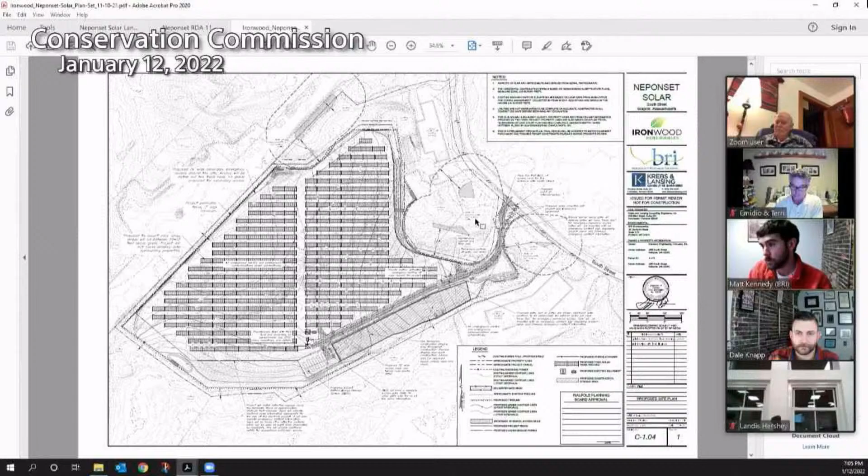So here's the entire site plan. Specific to this RDA, we performed a wetland delineation, and on the site plan you can see where we flag these wetlands. They're all pretty small wetlands that we have given. None of them are bordering vegetated wetlands based on the definition in the Wetlands Protection Act and our communication with the conservation agent. We did a site walk back in the fall and looked at these. The project has respected a 100-foot buffer surrounding these wetlands.

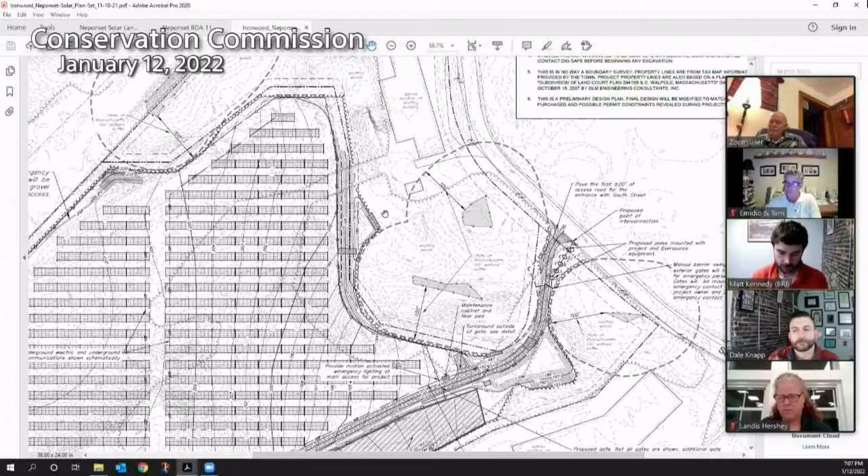Regardless of them not being BVWs, we've still given them that 100-foot buffer. So that's what we put into our RDA, that we do not believe the Wetlands Protection Act is applicable and we're not going to need to do any compensation, because we're not impacting any of these, and they're not regulated wetlands under the state's wetlands laws. I'll open it up to questions on the RDA for now, and then we can go into the land disturbance application if you have more questions on that. We'll proceed on the RDA at this point, then we'll get back to the land disturbance permit.

So, Landis? Yes, hi Matt, I just had a couple of questions. One, when I was out on the site and we walked it, there was an area of wetlands to the far end of the site, all the way back. This one? So if you go all the way to where the hill is, yeah, and the little basin, somewhere. I remember walking through the site and standing on a ridge and then heading down, and there was a wetlands there. Was that determined to be way off-site, or?

It was, yeah, it was off the property. And over 100 feet, so it wasn't even shown on the plan? Correct. I think we did locate the stream off-site, Matt, I don't know if you have that distance off the top of your head. We were able to use aerial photos to snap a few lines, and I believe those were included in some of the application materials. But that wet area off-site, the back of the parcel, was off property and is 100 feet from the limit of disturbance.

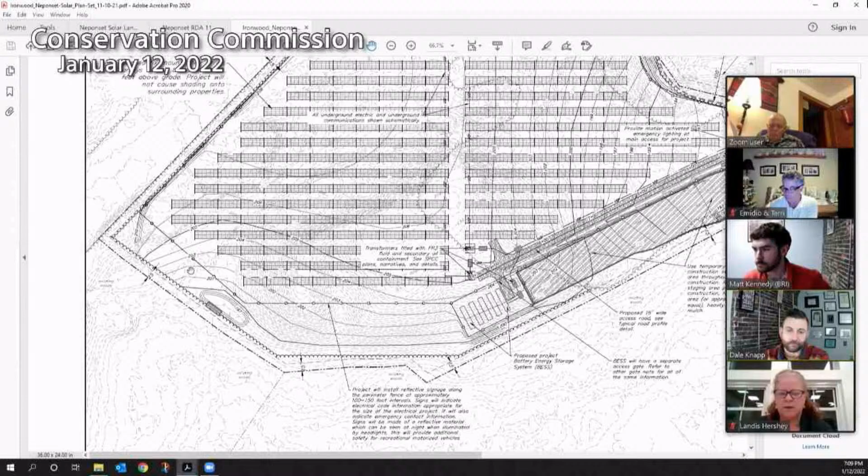I just wanted to explain that the Neponset River is across on South Street and also to the east of the property, over 200 feet from your site. That's correct. We're not within the riverfront area for this project.

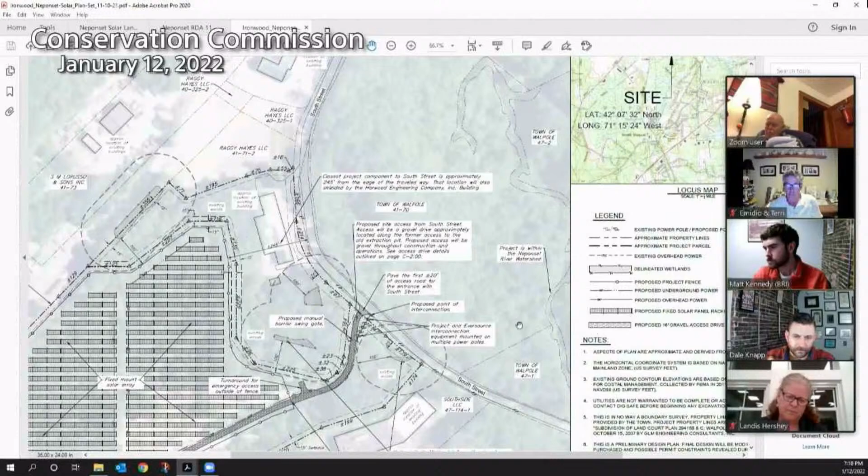Just showing it's there, and then it loops up around behind the building, not Tufts, but the other building next to Tufts. It loops up back. Oh, there you go. That's good. So I just want everyone to see how far the river is away from the site.

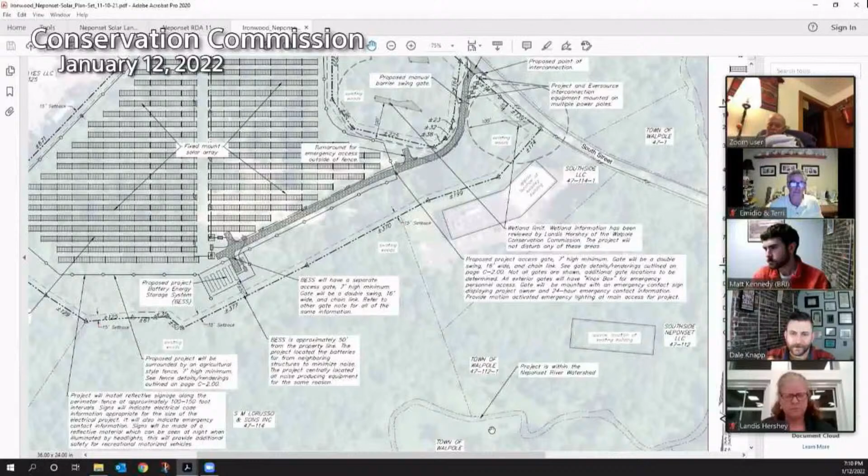Anything else? Any questions? Dean? No questions for the RDA. Bailey? No questions. Doug? Yeah, just a maintenance question.

In the winter, if you need to clear snow off the solar panels, where would you store it? So we don't clean the snow off the panels. It subsides off as temperatures change. The angle of repose of the panel allows it to simply slide off after it snows. Typically the drip edge is about 36 inches above the ground, so as that snow slumps off, it piles up on the ground. Removal of snow within the footprint of the panel area is not required.

So Doug, we were just going to do the request for determination and get that out of the way under the Wetlands Protection Act and the local bylaw, and then go into the land disturbance where we can address more questions like that, because there are two different votes.

Okay, I have no other questions. Betsy? No comments. Al? I don't have a problem as far as the determination is concerned. Jack? Yes, I don't have any questions either. Emidio, any questions? Yeah, I have several questions. No, okay, thank you.

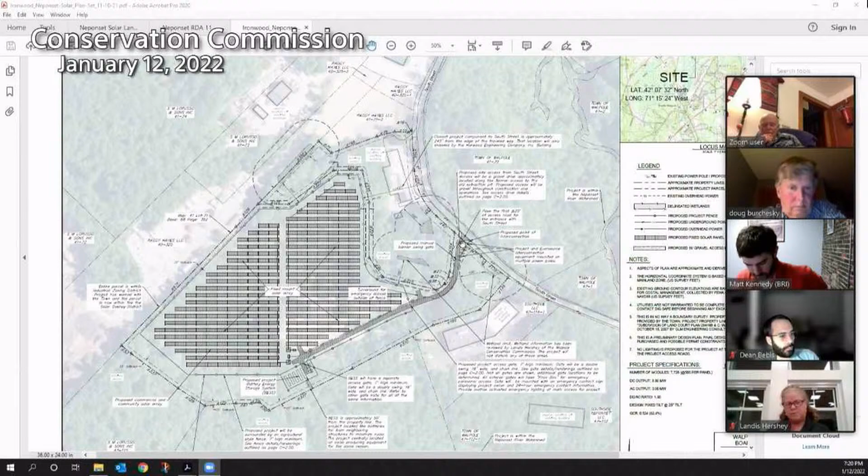But other than that, we propose to install a fence around the entire project. The NEC National Electrical Code requires that it be at least 7 feet high. We've got an access gate here that we propose to have a Knox box that will allow for emergency personnel to access the property in the event of emergency. They'll have the ability to open these gates and get in with their vehicles and equipment.

There'll also be some small signs at the gates that will have 24-hour emergency contact information. There'll also be some motion detecting lights at the main gate, so that if a car pulls up, they can find that emergency access number pretty quickly without the need to pull out a flashlight or anything like that.

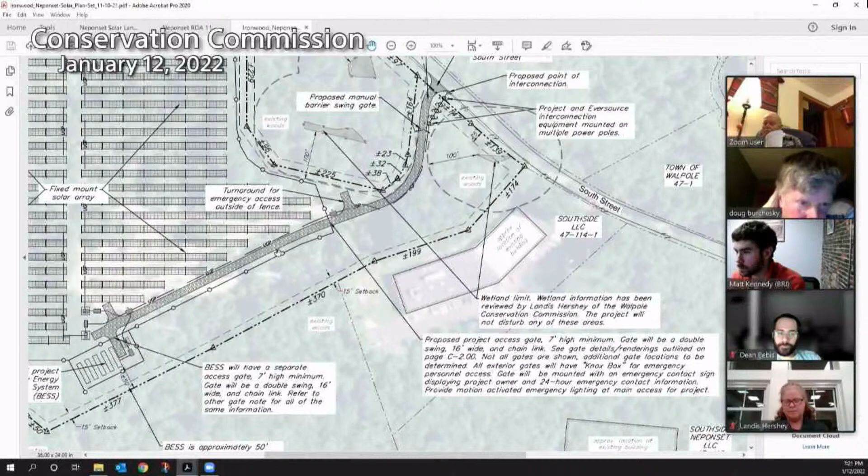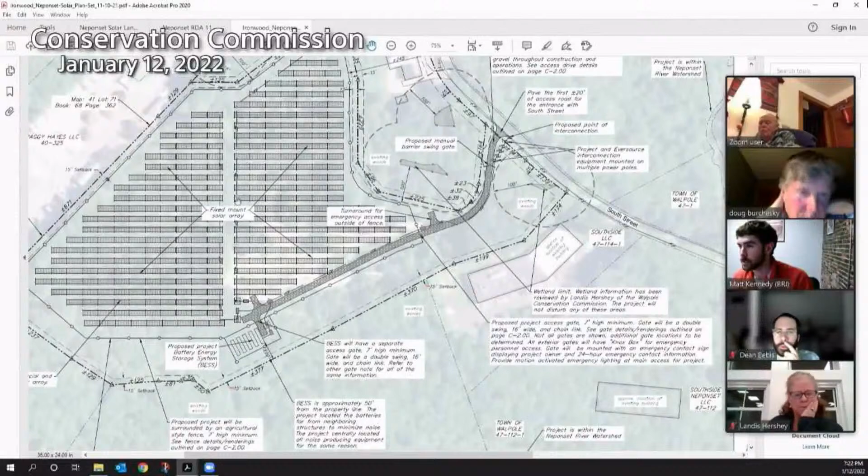That's pretty much the rundown. We have some more maps here that we can share and look at, some more specifics of the watersheds and everything, but I'll open it up to questions that the commission has.

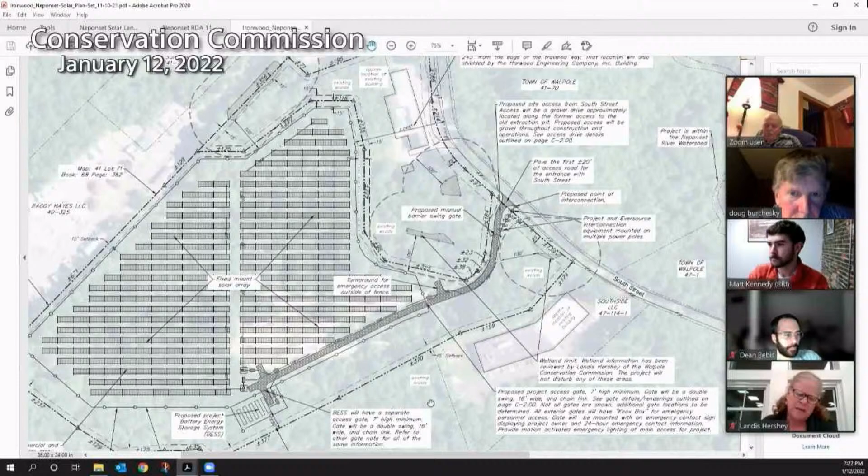Okay, Landis? Can you talk about the clearing, the phasing of the clearing, how you're going to handle that? During construction stormwater management, you have a siltation basin, you have a few sediment basins, you have a swale. Can you describe all that stuff? That's really the meat of the stormwater management and erosion control bylaw - how you're going to handle stormwater during construction and stormwater post-construction.

Yeah, sure. I can turn that kind of stuff over to Greg Dixon, who's the civil engineer who's provided the drainage report.

Yeah, so I think the bulk of how we are looking to handle stormwater post-construction, Matt kind of discussed, is creating the field, creating a meadow of the existing field, and really letting that vegetation take over. In our operation and maintenance plan, we outline that it'll only probably be mowed twice in a growing season, so those grasses will get probably 2 to 3 feet high, and they won't be mowed like a lawn, more like brush hogged.

The intent is to have that area well vegetated during operation. The biggest thing helping us on this project is the removal of materials. The existing site grades are kind of compacted together and very steep. Majority of the grades on site right now are at the repose of the soil, meaning they're right before they would want to give out anyway. So it's about 3-on-1s, 2-on-1s, 4-on-1s, that sort of thing, and we'll be taking a lot of that out and relaxing the slopes on the whole site.

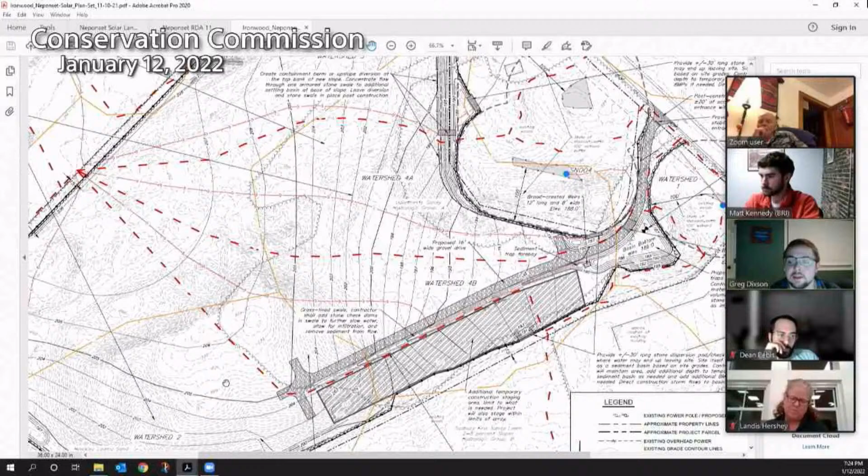So it'll go from a large majority of the site being over 15% slope. We included some maps showing existing and proposed conditions, the red and yellow showing the 15% and high percentage slopes, and then what it will look like afterwards, which is a lot more relaxed, down into the below 8 and 5% range. That's where we're getting the bulk of just having water stay on site a little bit longer, because it's moving more slowly off site, staying on site longer, and having more time to infiltrate.

The soils on site are very good, all hydrologic group A pretty much, so we are expecting very high infiltration rates. As part of my drainage report, I did not assume a very high infiltration rate, so we're being very conservative on that. Right now we haven't done testing yet in the infiltration basin, so we're using the lowest value for those infiltration rates, about 1.4, which just knowing the soils, I expect that rate to be nearly 10 times that amount. So we are expecting a lot of water to stay on site longer and infiltrate even further. That's how we're going to manage stormwater in the long run.

During construction, it'll be a lot of the same best management practices you'll see on any normal construction site. The site will be cleared of vegetation that's on there right now. We are requiring that only happen in 5-acre blocks. As the contractor moves, they will disturb 5 acres and then have to temporarily seed and stabilize those areas before moving on to the next 5, or a lower number if it makes sense for them.

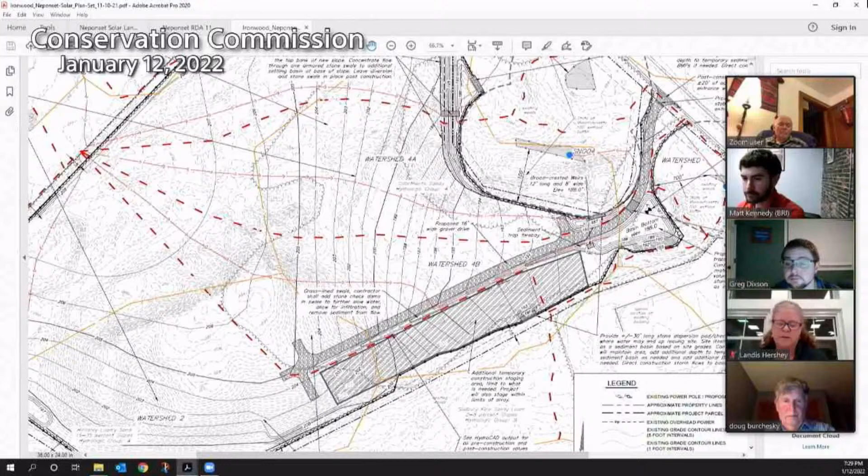I just wanted anyone in the audience, as well as the commissioners, to understand what your plan is for construction stormwater management. You have a few sediment basins that are just temporary basins used during construction to collect stormwater. Is that the idea? And then post-construction, will they stay or won't they?

Your plan was a little confusing because it combined post-construction and erosion control, which we usually have separated - erosion control and then post-construction - everything was combined on one plan. So those temporary sediment basins, are they going to be there post-construction, or are they just there during construction?

So the original plan was just having them there during construction, and then they could be removed post-construction once the meadow kind of took root. But after conversations with Carl, the town engineer, he just requested that they remain in place, and I had no issue with leaving them in place.

They'll just be grassed basins with a gravel outfall to maintain that so it doesn't scour and go away, and those will stay in place. Again, to be conservative, I did not put those into my stormwater model, so that's over and above the numbers we're showing on the plan and in the stormwater model. Those will stay in place and continue to have water stay on site and further infiltrate into the ground as much as possible.

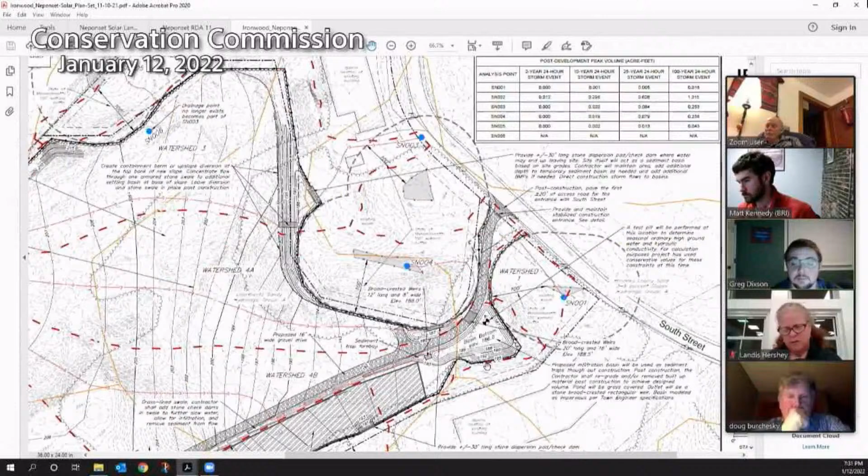So the only true infiltration basin is the one near the gravel driveway where you have a sediment forebay as pre-treatment. Yep, that was the only one designed mostly to treat all of the roadway.

Okay, so the whole site is going to be disturbed and graded, and it's going to be a cut and fill - is there any material coming off the site, or are you pretty much taking the hill down and distributing it throughout the site?

No, the plan is that material will be taken off site. Some material will be taken off site - quite a lot of material will be taken off site. Right now, we're estimating it at about 65,000 cubic yards.

But that's a little bit of both - we will also be using some areas to fill in, but right now we have material planned to come off site. Okay, and you are right, that's kind of the big hump that's in the middle of it.

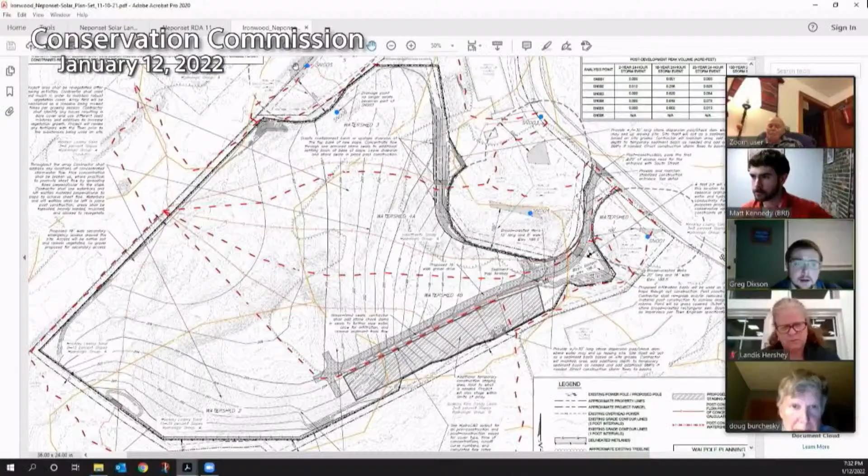So the material that you submitted references a vegetative management area, and I know with other solar fields there's the arrays, and then there's an area usually where they keep the vegetation low. I didn't necessarily see a symbol on any plan that outlined where that area was - I don't know if we really had a vegetation management plan.

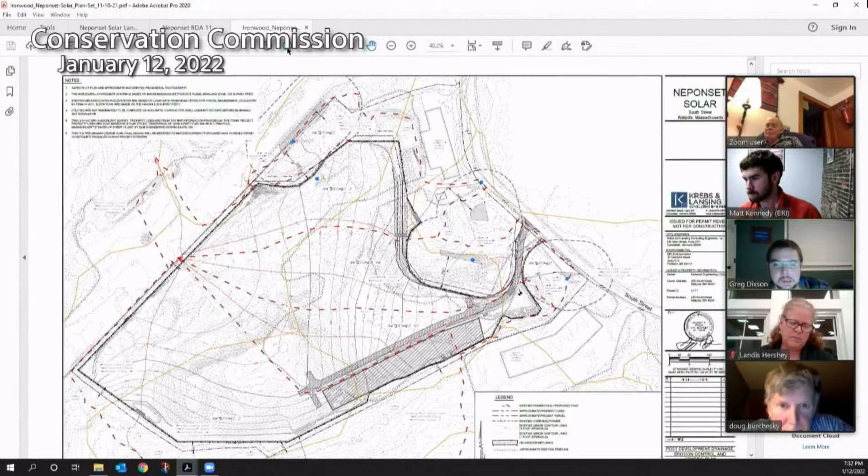Matt, if you go to the actual array itself - maybe the more detailed page, the one right after the stormwater, I think C104. So on this, you can kind of see south of the site, maybe not in the battery location, but all those areas outside the fence.

We don't really have any reason to maintain those as a meadow as we described. Those will be able to rebound even further past the 2 to 3 foot we were talking about earlier. It also falls off in elevation pretty quickly, almost 5 feet from the edge of the fence to the edge of the woods. I could see those areas just being allowed to rebound to almost 15 to even 20 feet of vegetation in those zones without really having any effect on the array itself.

I don't know if we will manage it to the point of going in there and either adding more woods or not clearing some of the trees. The trees in there right now aren't really significant, it's more of a scrubby tree mix. We do need to grade it, as you can see, because of the existing grades on that site, but after that it will be allowed to rebound. I don't know if that is considered vegetation management as much as it would mostly just be a passive vegetation management zone.

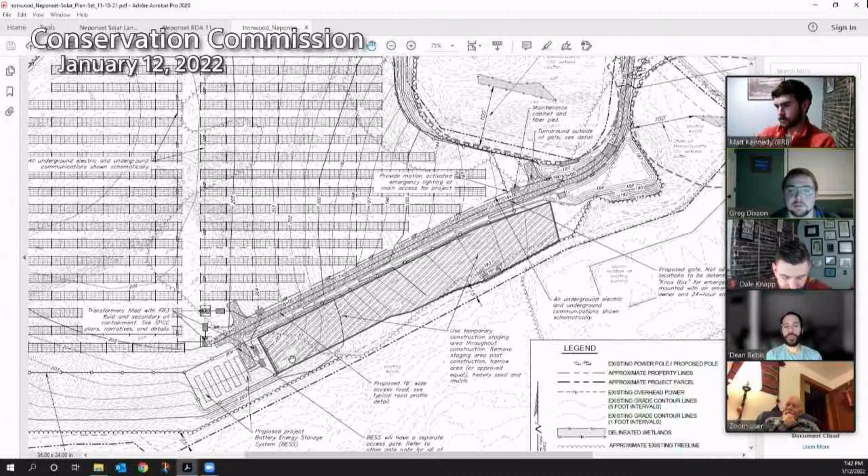If you guys have a truck route, do you have to do that? A trucking route? Because that's a lot of soil - that's a lot of trucks.

Yeah, it seems like it's pretty good material. So you guys can just include that stockpile area on the plan that I'm asking for with stormwater management.

Yeah, the EPSC plan - is this what you're talking about, Greg? This area? No, I kind of thought it'd be more where it says provide motion activated emergency lighting, kind of right in that location, because it's flat and already cleared. Yeah, here, kind of right where that note is. Oh okay, right here.

You guys have a stockpiling objective? We're going to stockpile 500 cubic yards and do loadouts, or is it just going to be load until go? Do you have a plan yet? No, not really - we have to find the off-taker and then determine how quickly we could move stuff.

Do you guys have a dust monitoring, dust control plan? No, not yet. Landis, are they obligated to do that? I think there is an item in the SWPPP that refers to keeping the dust down, I believe. I have notes in my details about dust control, but I don't have an actual dust control plan.

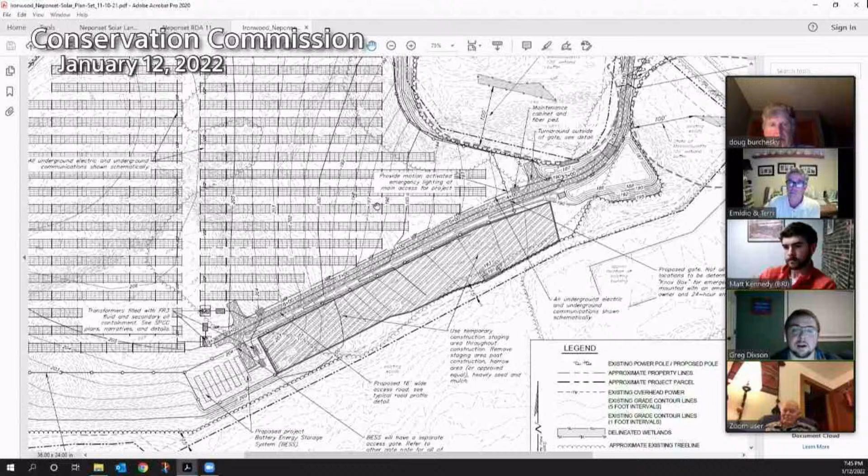That's going to heavily depend on how quickly and how motivated the material moving process is. It can go very quickly depending on the scale of equipment thrown at it, or it could be over one season with the build happening the next season. But taking that out of the equation, clearing to fully erected project normally takes about a summer, so somewhere between 5 to 6 months.

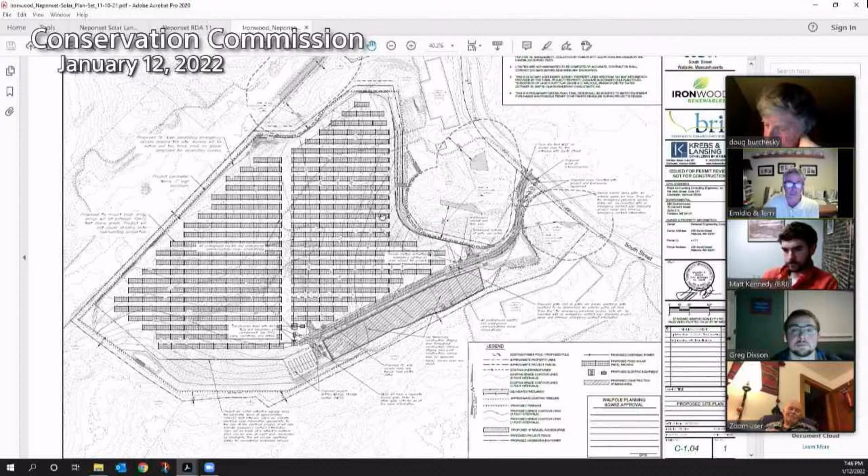So you'll clear in 5 acre segments and stabilize that, then move on to the next 5, and so on. You'll stabilize all that with seeding. I have a temporary and permanent seed called out on my site plan, as well as the pollinator mix. The temporary seed has a little more rye in it, which pops closer to a week and a half to 2 weeks, so it really helps provide quick stabilization when needed. We also have multiple materials for temporary stabilization, such as hay, straw, mulch, and erosion control mix. All that's outlined on C2.00.

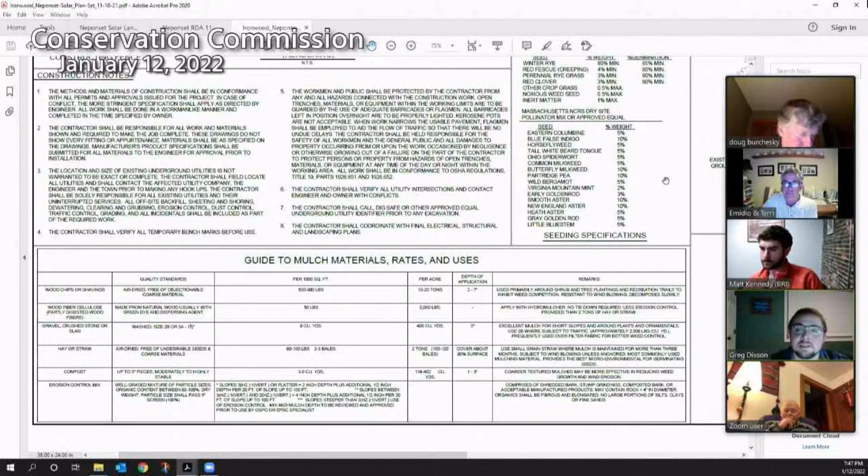So you're going to truck out 56,000 cubic yards in a matter of a few months, is that accurate? It was 65,000 cubic yards. And as I mentioned, that really depends on how much equipment you throw at the problem. If we're talking just a few dump trucks, it would take a whole season to take that much off, but if somebody really needed that and had the ability, it could go down to 2 or 3 months. At this moment we're still working to find that off-taker. When the off-taker is found, I think we'd be able to refine that scope. But it could be that process takes an entire construction season, and the project might construct the next season after, at which case it would be permanently stabilized in that intermediate time.

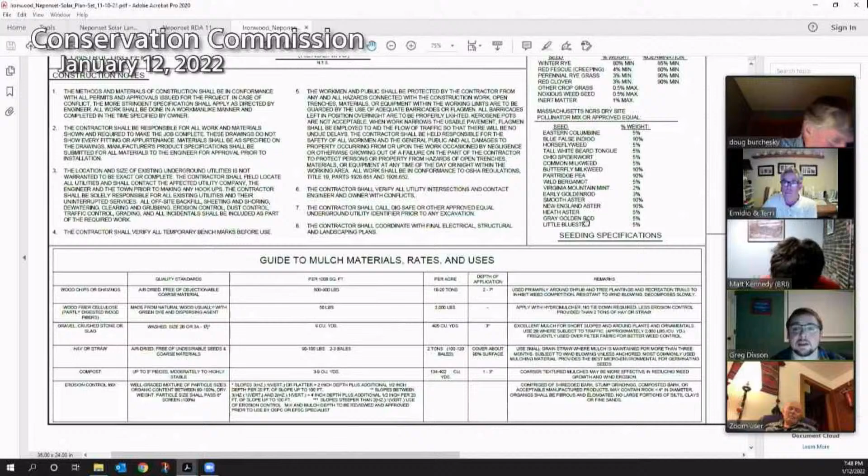Okay, all right, thank you. Betsy?

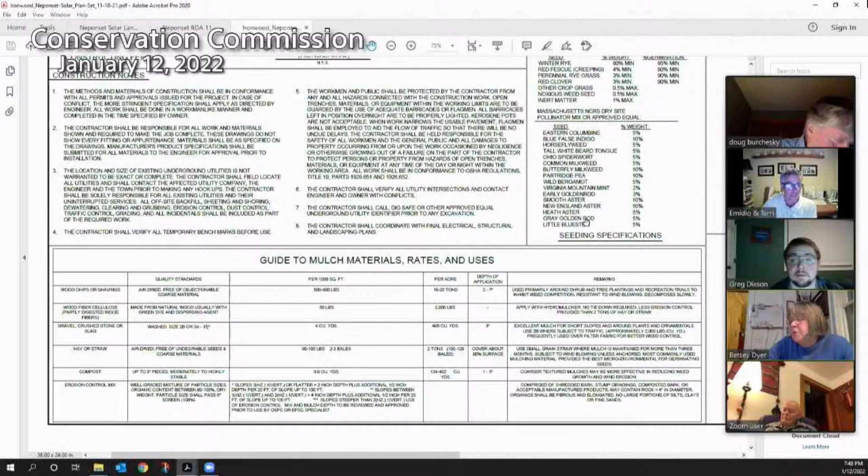Yeah, a comment and a question. My comment is I think this should be continued to another night because we were awaiting the engineer's comments, the town engineer, and also you're updating your notebook so that it conforms a little bit to what we're typically looking for in stormwater management. Some things have been brought up that maybe shouldn't be quite so boilerplate in the notebook.

And then a question: are there already a lot of invasive species on this site? I actually walked out there a few years ago. I know it's a great big gravel pit that was used by off-road vehicles, that was my impression of it. But do you have a lot of invasives out there?

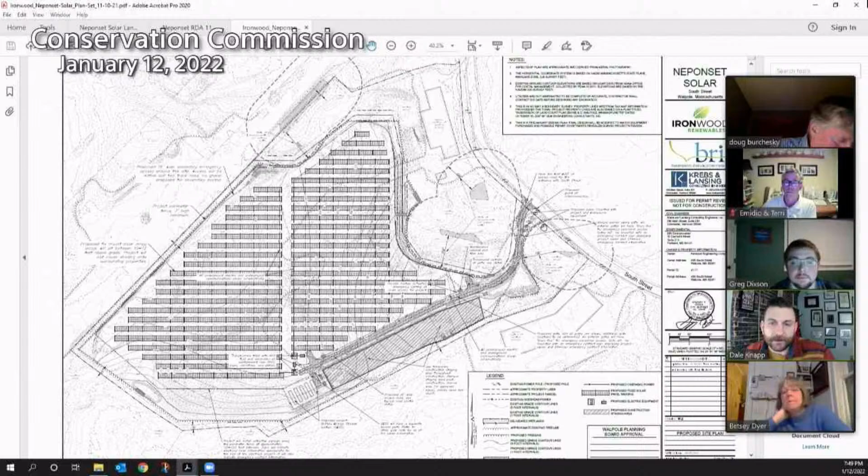Yeah, this is Dale Knapp from BRI. Indeed, there are some woody vines and definitely some invasives closer to the road along the back fringe of the site. Is that back fringe the part behind those wetlands, where Matt's hand is there? So actually in the area Greg was talking about using for storage, much closer to the road, that berm is primarily where I observed invasive species. I think there was some knotweed out there, and some Lonicera as well. Management and removal of that vegetation would hopefully reduce the spread of those species. But I didn't observe any along the back of the site or to the south of the site.

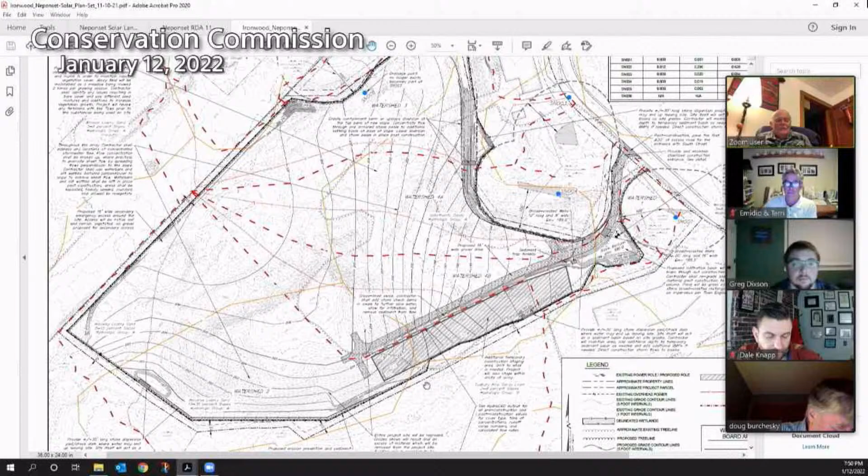When this is regraded, what's the finished grade? Because you're going to take a whole lot of stuff out of there. So the finished grade, what's that going to be in relation to the flood zone that's not too far away from the Neponset River? I want to know, you're going to grade this out level, but you're removing it all instead of just filling in the low spots.

And that's one of my concerns. The next one is we've had a bad experience with a solar farm with erosion because they cleared off the whole place and it wasn't stable, and we had erosion with water.

Well, what about nowadays? We seem to have an awful lot of high winds. What are you going to do to keep the dust down? I don't see anything about watering when you're reestablishing these grasses. They're not going to grow if we go 2 or 3 months without rain. So I think we have to have a plan for how you're going to maintain these grasses in their infant stage while they're just germinating.

And of course, we don't use those straw wattles that weigh nothing and wash away. We like compost socks that are heavy and stay there when it rains, and they stay there when the wind blows.

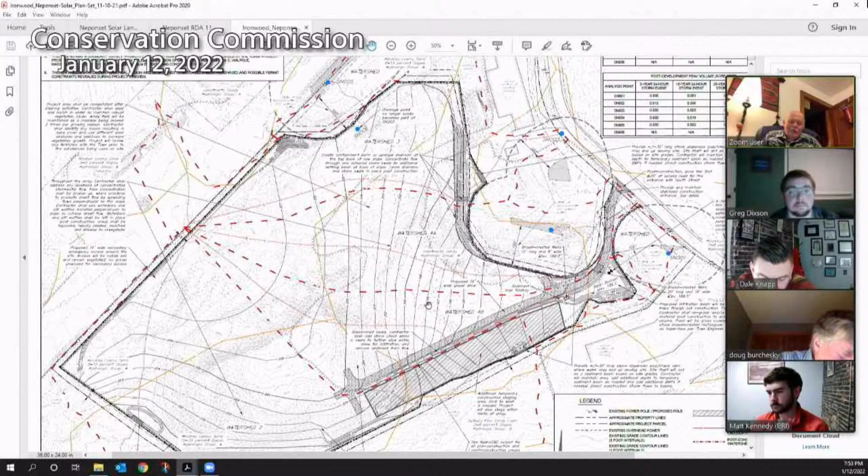But I'm concerned about you taking all this fill off site and lowering the elevation. Will that elevation eventually be close to the elevation that floods in the area? So those are my concerns, and I want to see something to address those.

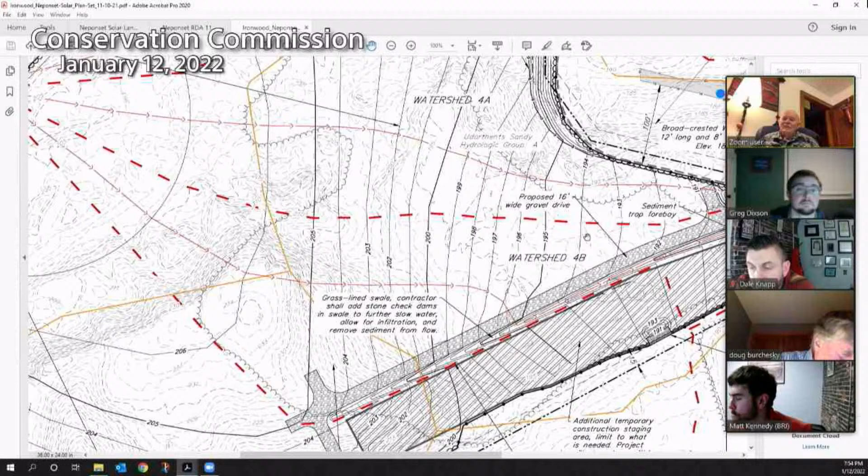Okay, Jack. Okay, thanks, Al. Question on the containment for the transformers. You've got a moat surrounding the vault. If you could explain how that works. Plus, the vault itself — is there enough weight on the transformers so it doesn't float? I don't know how deep that vault is relative to the water table.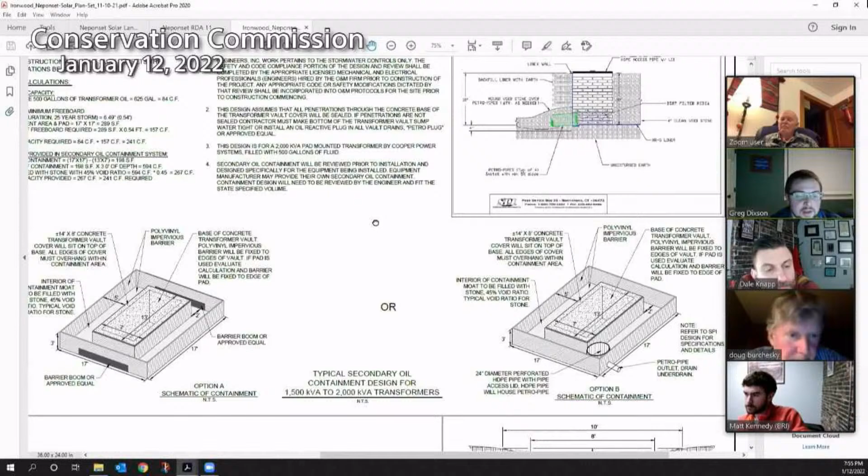Yeah, so that is a normal electric vault. They're normally only—I think Matt, if you go to the last detail page. So I kind of tried to draw it here. Those vaults, normally the moat that surrounds the vault is about 3 feet deep, and the vault itself will only sit an additional 2 feet below that. And that actually has a weep hole in it to allow it not to float.

The transformer will sit on top of that vault, and it will sit on top of another concrete cover. In that cover, if anything were to happen, materials would just overflow on top of the cover into the moat. That moat is filled with stone, so it'll just look like the transformer is surrounded by a stone area, and it's designed so that if anything leaks off of it, it leaks into there, and then there's an outlet barrier boom that reacts with any oil, or in this case, they have one that reacts with the FR3 fluid, and it locks that up, so it'll let water through. But once anything were to happen, it'll lock up and hold everything else.

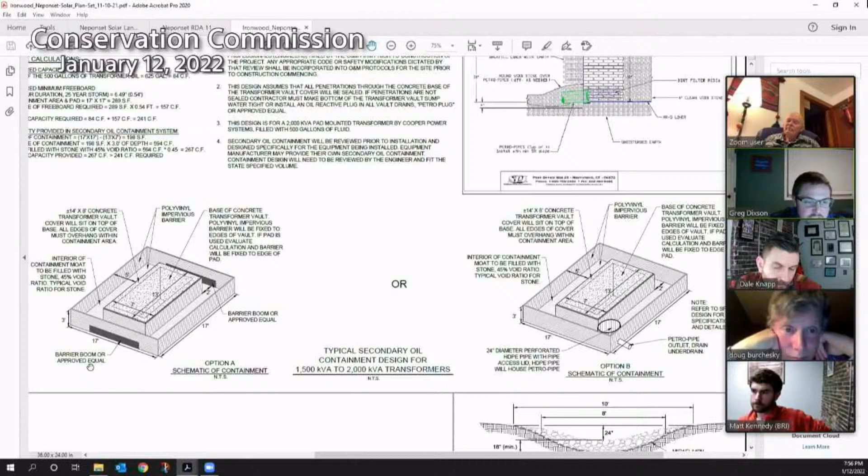And so that moat is designed for, I believe, 125% of the total — I'm calling it oil in this case, but it'll be the FR3 fluid — so 1.25 times that amount plus a 24-hour storm event happening simultaneously at the exact same time. So we feel this allows for a lot of containment at once.

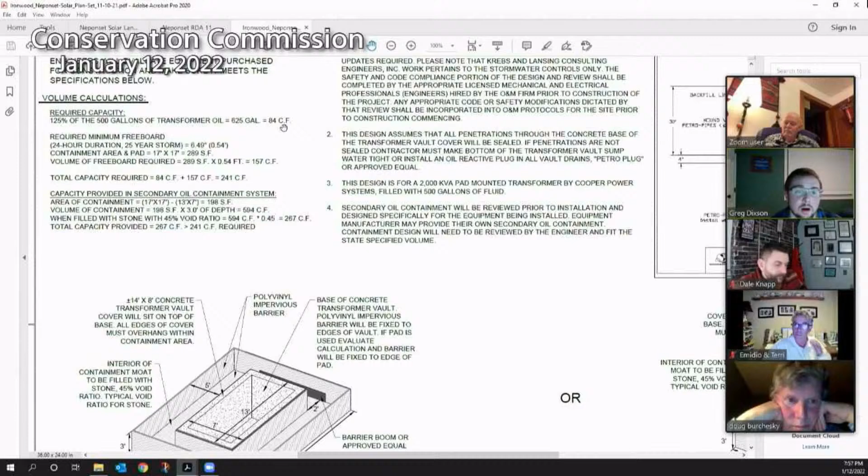We've had these, and I've never had one float. The transformers are normally heavy enough to keep them down, and I do not expect the water table in this area to be higher than 5 feet. I had a conversation with Carl, and he also agreed that the water table is likely at the elevation of all those pockets of wetlands around the site. We will be evaluating the test pits on site with him as part of his comments. But in all of my calculations, I used that elevation of 182 as an expectation for the water elevation on site.

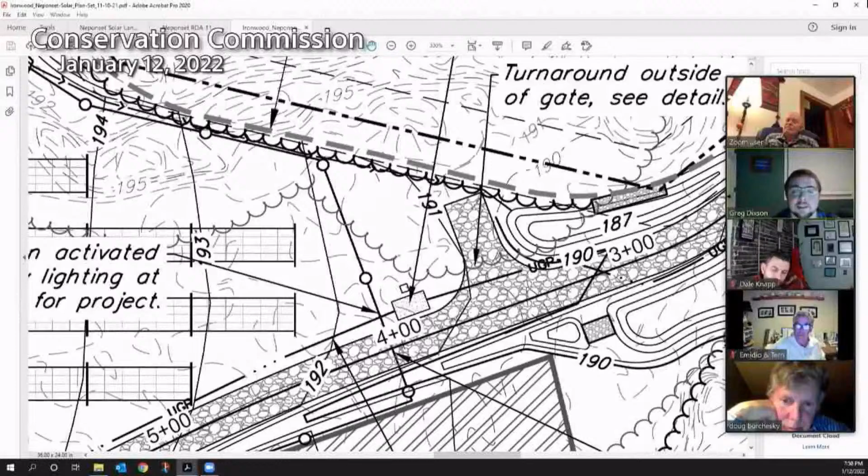And so all the transformers, if you can see where those are located, will be almost 10 feet higher, with that sitting in the ground maybe 5 feet. And furthermore, we also will have an under-drain system around that to keep those dry, even more dry as well. Does that answer the question? Okay.

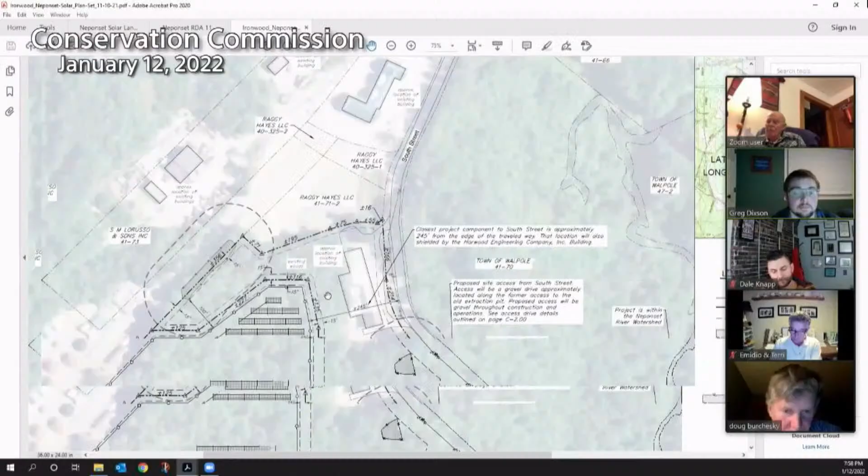Nobody there? Not that I could tell. Okay. Okay.

You are going to look for some additional information, Landis? Yes, I would like the erosion control, stormwater management during construction plan with everything that's anticipated being applied, and if that is revised once you have a contractor, that's fine, but I think we need to start somewhere on a plan and not just in text. That would include stockpile areas, temporary basins, the construction entrance, some kind of phasing, notes on temporary stabilization, erosion control, the silt sock being used and any silt fence being used.

Yeah, I think we also need to, since there'll be a lot of traffic coming out of this with the sand and gravel removal, that there be something in our order that would include making sure that whatever is on the truck stays, it does not get dropped on the street. So some kind of, more than the usual construction pad entrance, but we also want that if there are issues with that, they come up with an additional means to keep that from getting out on the street.

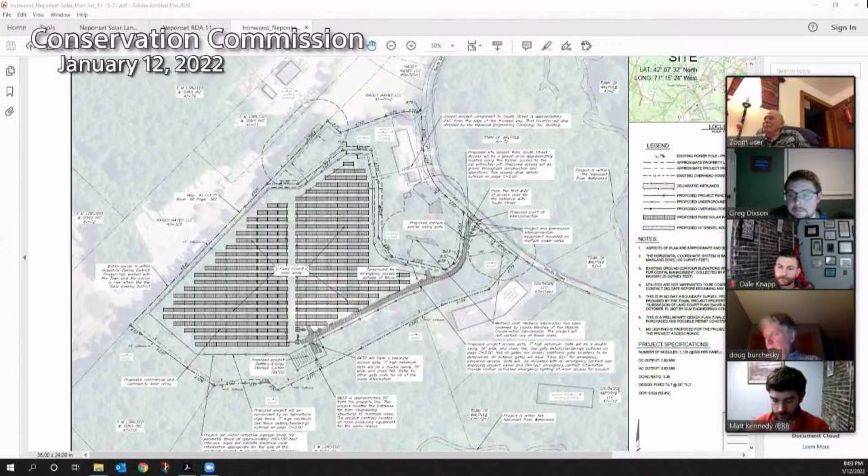Okay, so you have some things to do, to make some revisions. How soon can you get that done? Our next meeting's the 26th. We need revised plans how many days ahead of the meeting? If you can get them in the Friday before the meeting, that would be enough time. For the 21st.

Yeah, are you guys gonna provide a formal list of these requests, or should I just go back? I took notes. I did too, but we'll email them out tomorrow as well. Yeah, that'd be helpful, just so we're all on the same page. Yep, that'd be great. And I think we can get that done, no problem, before the 21st.

Okay, so what do we have on for, would you like hard copies as well as digital versions, obviously? We would need a digital, and then I would need just 4 copies of the full-size plans. Yes, and it can just be that one sheet. If you're revising one sheet, you don't have to send me a full set if you're not revising everything. Okay, we'll send you only the revised stuff.

Great, okay, so we're scheduled up to 7:45 on the 26th, so looking at that, we would make it at 8 o'clock? Would that fit? Okay, so we'll continue this till 8 o'clock on January 26th. Someone make that a motion? So moved. Second. Okay, all in favor? Dean, aye. Bailey, aye. Doug, aye. Emilio, aye. Betsy, aye. Al, aye. Jack, aye. Okay, so it'll be 8 o'clock on January 26th.

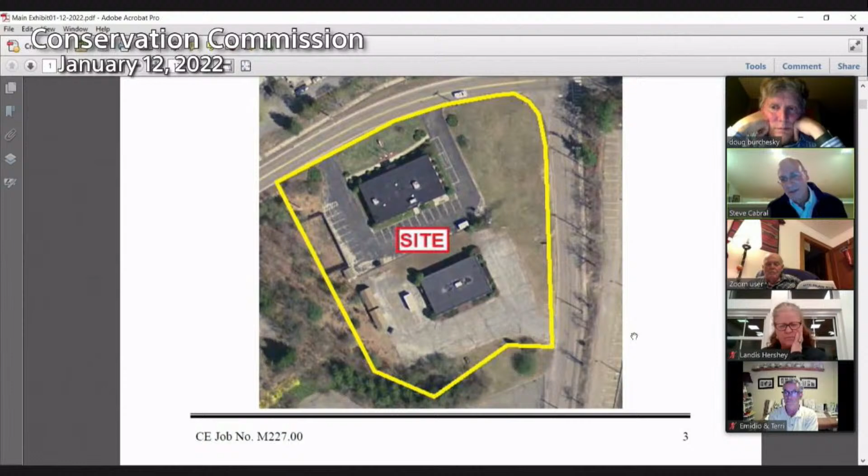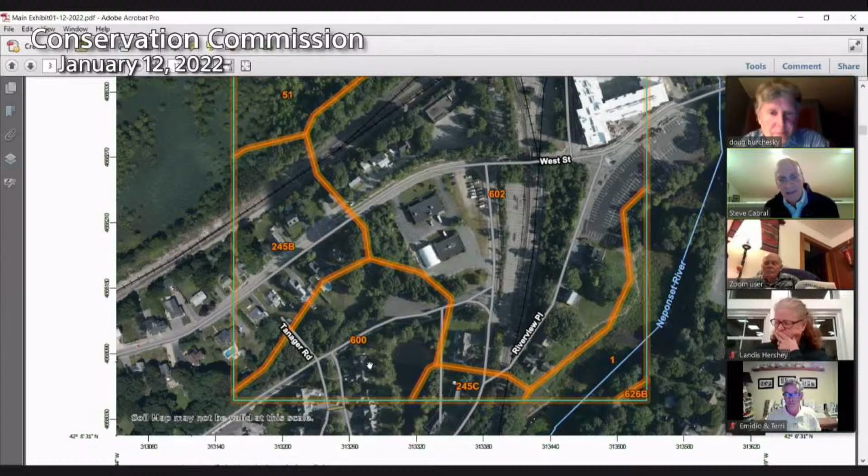This is the soil map, the Natural Resource Conservation Service soil map. 602 is identified as urban land, and the soil category just to the southwest is 600, which would be designated as a sand and gravel pit.

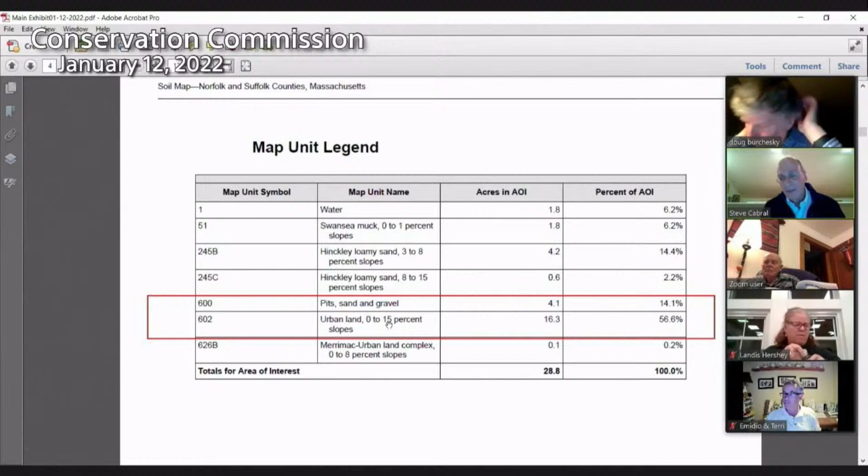Now, the reason NRCS identifies soils as urban land is just that it's been urbanized and there's no natural soils for them to witness. But as Carl mentioned in his review letter, he did witness soil evaluations with us on the property, and it was a very good sandy soil. The water table in the middle of the site was approximately 10 feet deep.

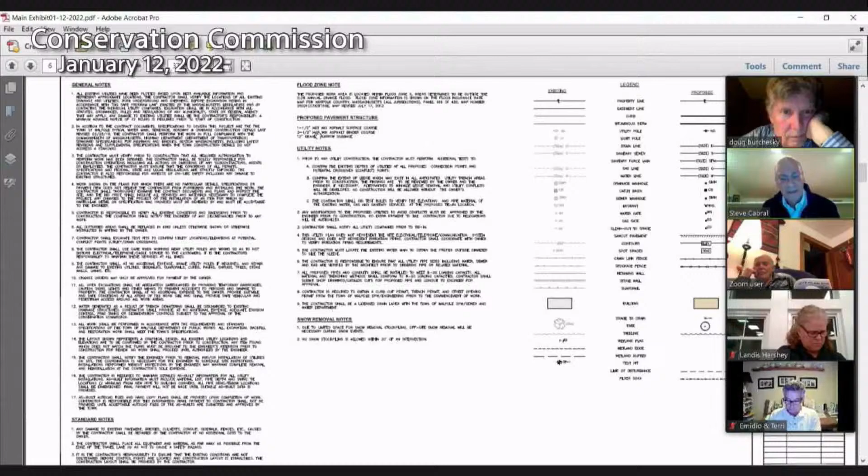One of the unique features of the building design is that each of the units will actually have a patio on top of the garage. So it will be a unique design.

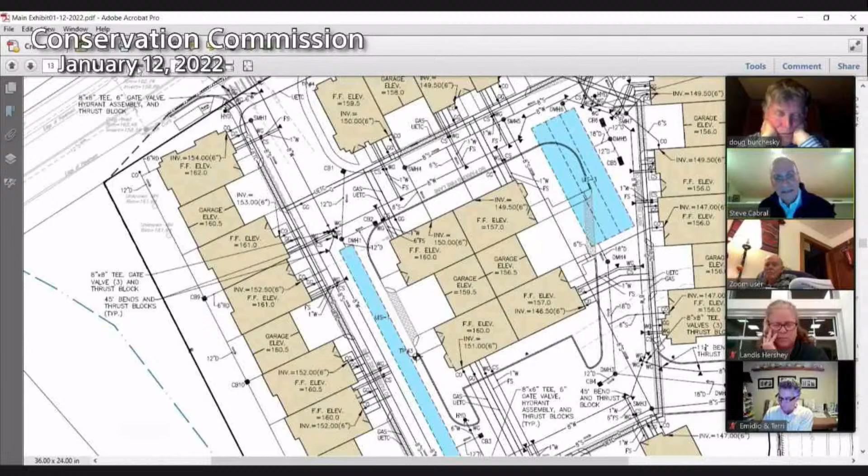Okay, we do provide a separate soil erosion and sediment control plan. Based upon the topography of the site, we know that runoff is naturally going to head towards the intersection of West and Spring. So after working with Carl, this is where we decided to put a temporary sediment trap. This is a temporary structure intended to collect runoff and any silt during rainstorms prior to installation of the impervious surfaces and the underground infiltration system.

Now, this plan does not identify any permanent measures, only temporary measures during construction. For example, we show construction access points, a crushed stone access, both from West and Spring. The reason we have them on two streets is depending upon the flow of workers or construction equipment, we don't want them to have to continually go through an intersection. We thought it was best to provide two.

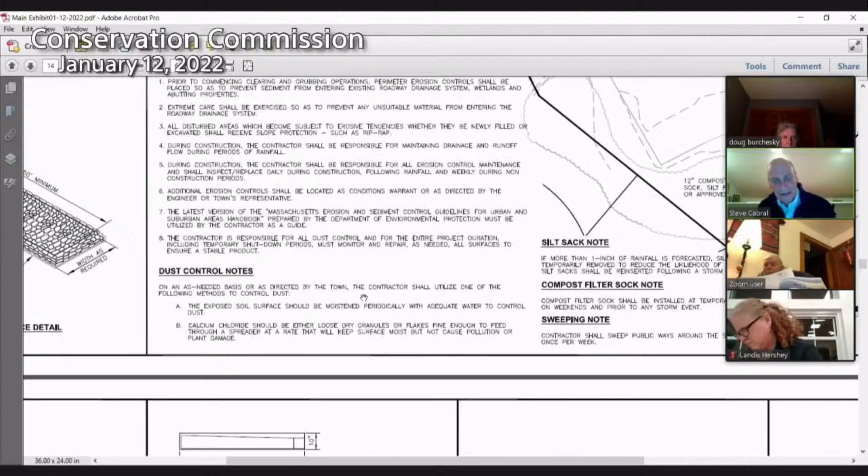We do show a potential stockpile area, but the stockpile will actually float, it'll move as construction occurs. And we have site-specific dust control notes so the contractor is aware he may have to use water to moisten the soil, or potentially calcium chloride granules, just to help keep the soil tight so it doesn't tend to blow in the wind.

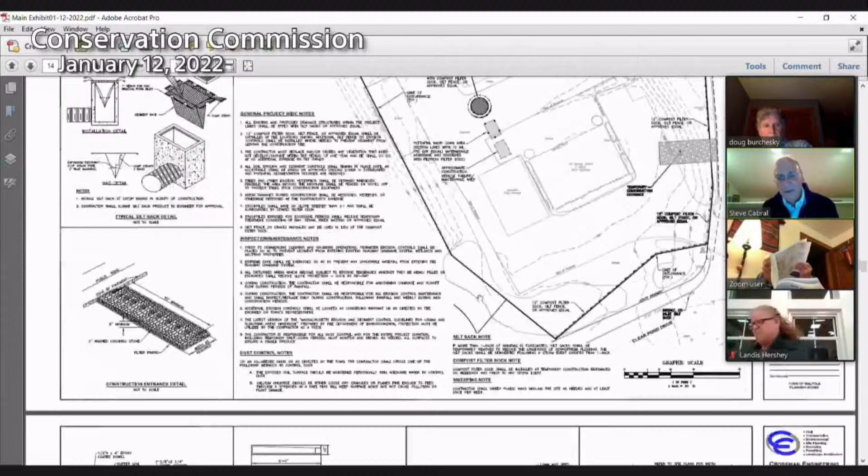We've also submitted a detailed SWPPP, which identifies the construction measures in more detail. And we've also submitted an operations and maintenance plan for the long-term maintenance of the underground drainage systems.

Okay, the next sheet just gives all your standard construction details, the parking lot striping, the curb installations, the sidewalk installations, etc. Continuing on, we have the standard catch basin and manhole details.

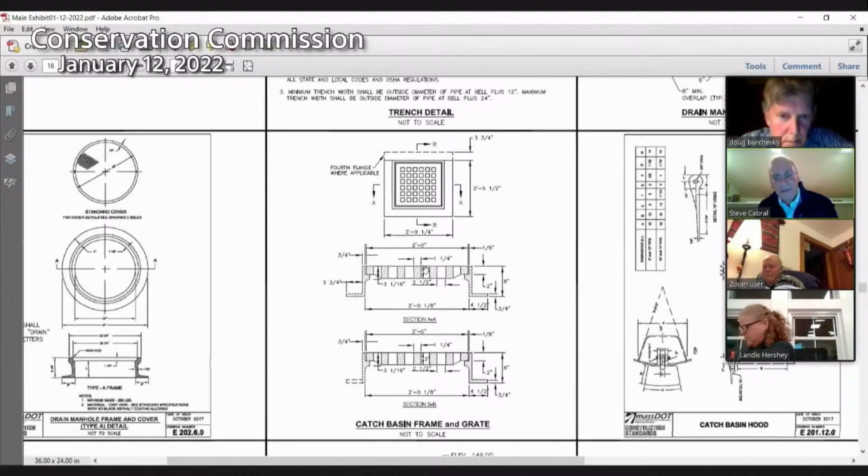And this happens to be the frame and grate that Carl mentioned, this is a new comment, he didn't mention it previously. We were using the standard 24-inch inlet structure, and I just heard that he prefers 26, and that's certainly easy to accommodate. The detail on the lower left represents a detail and sizing of that temporary sediment trap.

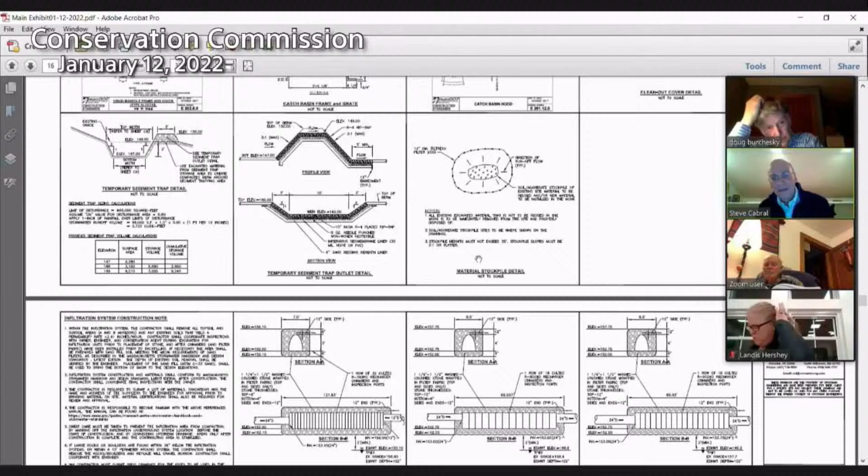And we also show a detail of your typical material stockpile area to make sure the contractor is aware that he has to have the filter sock around any stockpile area.

Okay, the next sheet identifies the typical details of the underground infiltration system. Basically, we're using high-density polyethylene perforated chambers surrounded by crushed stone and a filter fabric, and we provided details of how the roof drains would be interconnected.

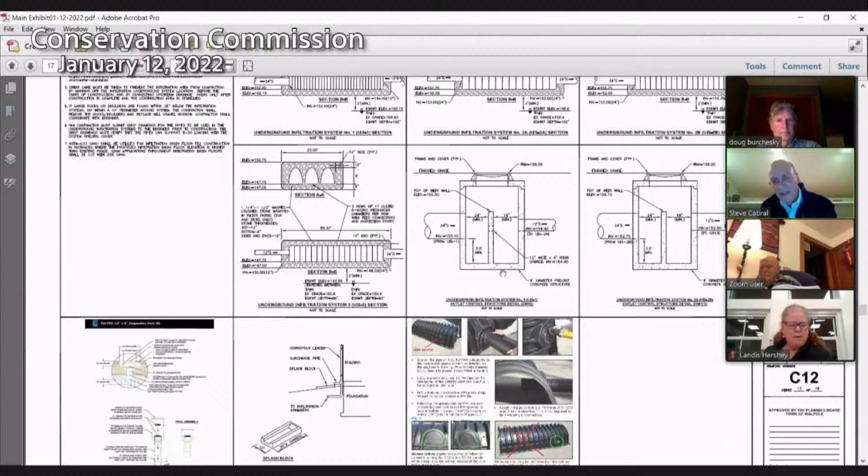Now, this structure here that I'm pointing to is one of the structures between two infiltration units, and we do have an orifice inside one of the structures. I heard in that memo read by the chairman that Carl wasn't sure if that was necessary. But one reason we have that is there's infiltration systems on both sides of this structure, and the orifice allows the flow to balance between both infiltration units. So it actually allows us to increase the infiltration that occurs on site.

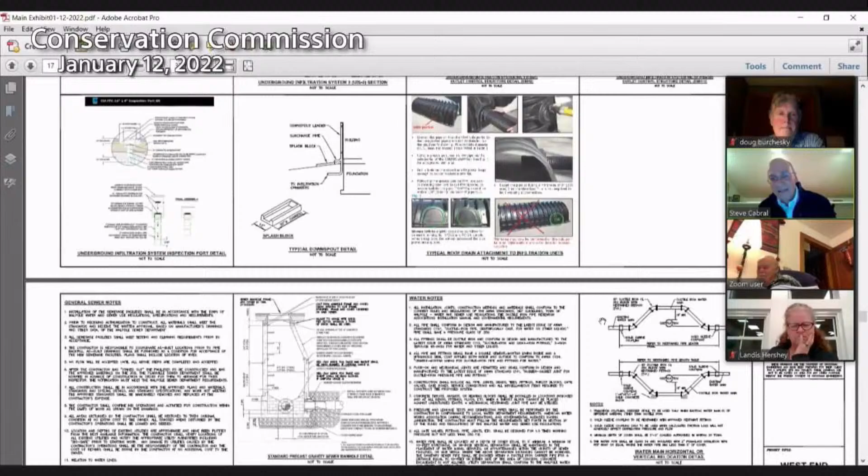Just continuing, we have more details of the utilities, the sewer and water systems. Next, we have a lighting plan. The reason for this lighting plan is to show that we have adequate lighting for the safety and security of the residents. Plus, we don't have excess lighting, so we don't have any light pollution onto the neighboring property. And all of the lights will be dark sky compliant.

The next sheet gets into the landscaping that we've proposed. We wanted to make sure that we have adequate buffers to the neighbors, as well as having an attractive facility on the outside and inside for people to drive by and also for the residents. And then next is just some details of the

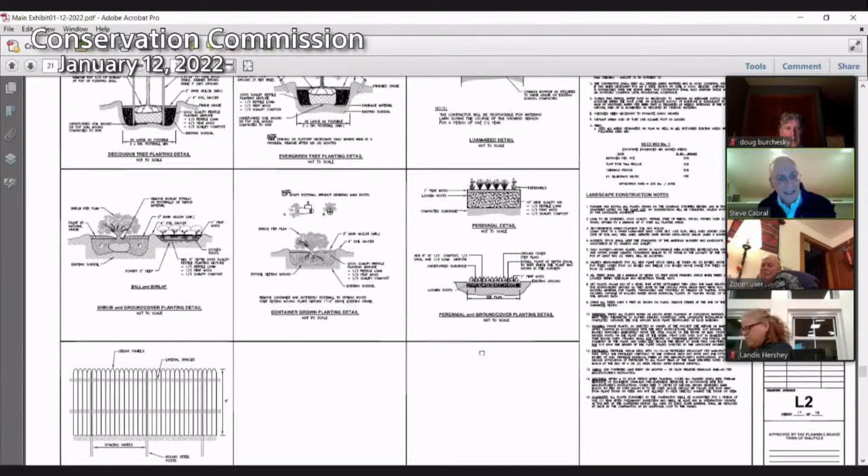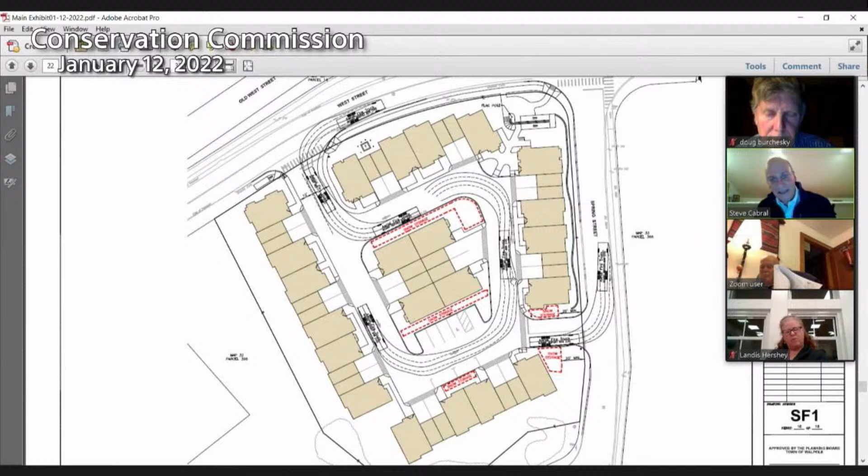landscaping plantings. Okay, this last sheet was prepared for the fire department and public safety officials. The image with the curves represents the town's fire truck. We prepared this so the fire chief could see that the fire apparatus could easily drive in and out of the complex, and the fire department was satisfied with that layout.

Okay, this is one of the typical soil evaluation reports that we prepared, and these were all witnessed by the town's engineer. Again, basically it was a sandy soil with the water table that really wasn't evident in most spots, but we assumed it would be about 10 feet. Now based upon the state stormwater design handbook, for sandy soils, the state allows you to use an infiltration rate for your design of about 8.2 inches per hour.

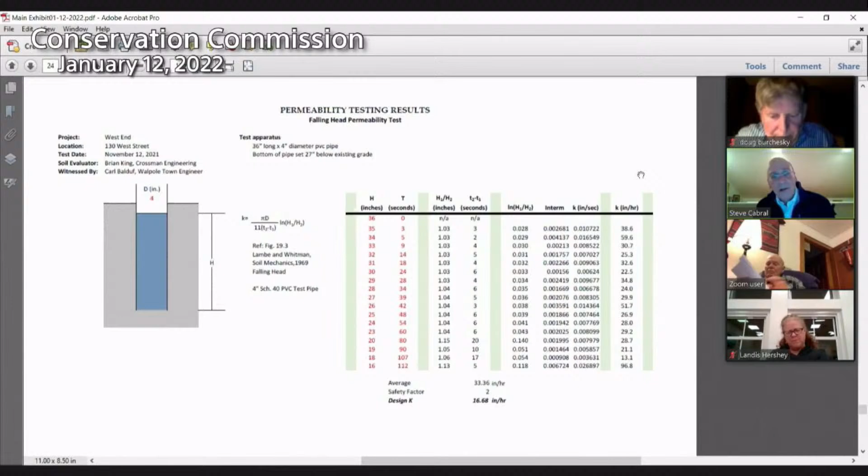Now, when Carl saw how good the soil was, he felt that we should go a step further and instead of using a conservative number, actually do soil tests on site. So in the presence of Carl, we did do permeability tests, falling head tests on site.

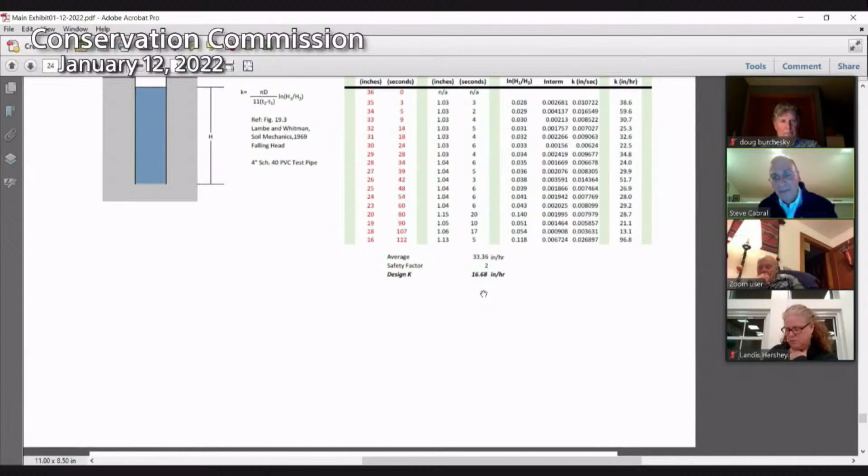And we found that the actual infiltration rate is closer to 33 inches per hour. So when we reran the numbers for the stormwater design, again working with Carl, we used a factor of safety of 2. We took the 33 inches per hour measured, divided it by 2, and performed an analysis to see how much flow is actually being held if we used an infiltration rate of 16.68 inches per hour.

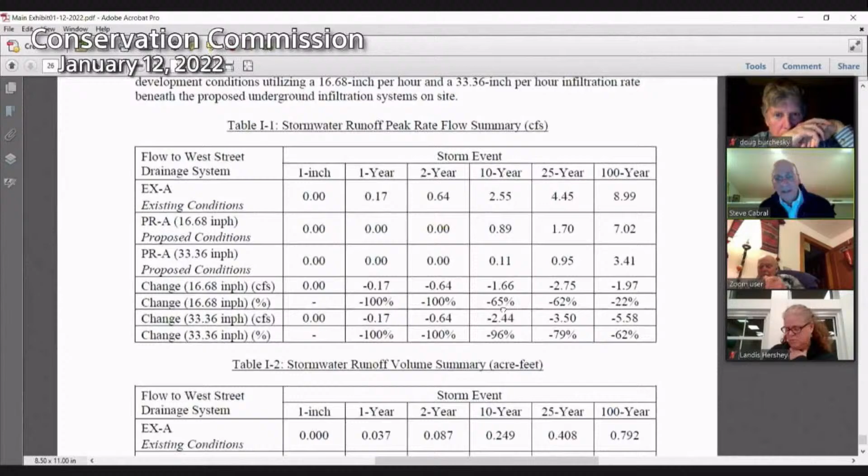What we found, I'll go straight to the results using the falling head tests. This is a table that identifies all of the existing flow and the proposed flow exiting the site. EXA represents the existing, PR the proposed. Because everything flows towards the common intersection of West and Spring, we only have one watershed. Under existing conditions, during the 2-year storm, there's 0.64 cubic feet per second leaving the site.

Under proposed conditions, there'll be zero. So there'll be nothing leaving the site from our underground system. During the 10-year storm—

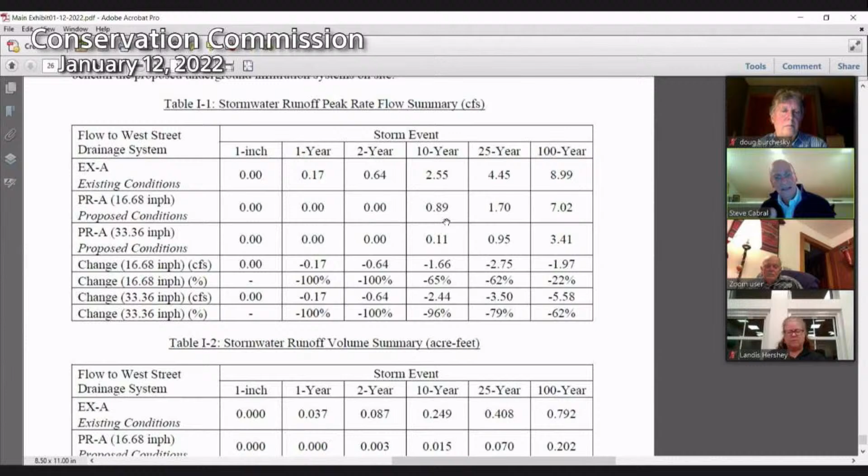Now again, this is only once every decade. What we found is that the existing flow of 2.55 is going to be reduced to 0.89 cubic feet per second. Now this 0.89 CFS includes not only runoff from the drainage system, but there is a fringe of landscaped area between the buildings and West Street and Spring Street. So this 0.89 includes those areas.

So the actual flow coming out of the overflow structure is much less than the 0.89. And if we were to use the 33.36 inch per hour value, the overflow once per decade is only 0.1 cubic feet per second.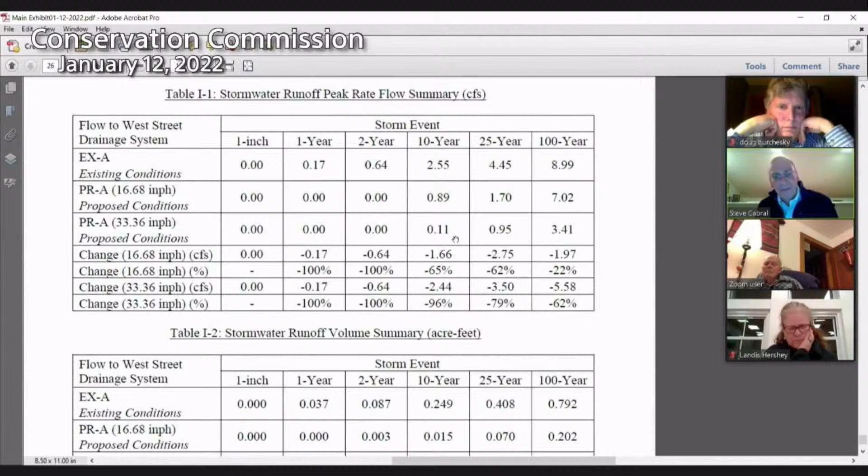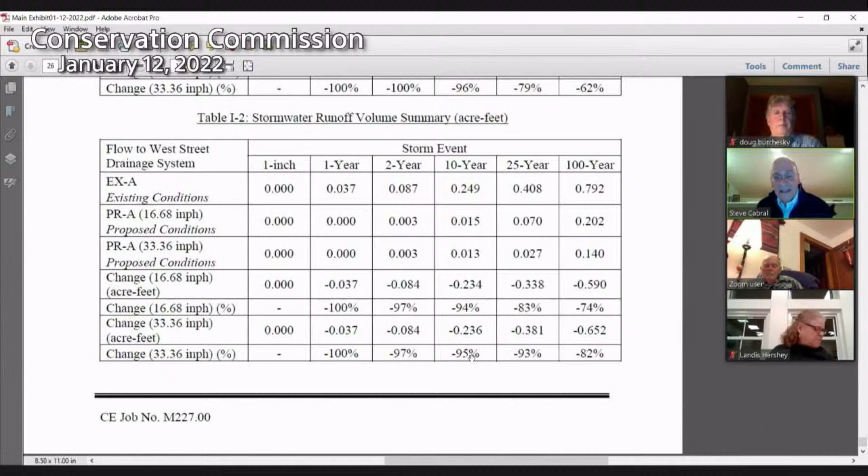And if we were to go to the volume reduction, in our analysis we looked at the peak flow as well as a volume reduction. For the 1-year storm event, we have 100% reduction in volume decrease. For the 2-year, 97%. For the 10-year, a 95% decrease in volume exiting the site. And if we were to go all the way to the 100-year storm, the way it's designed now, we're still providing an 82% decrease of runoff exiting the site.

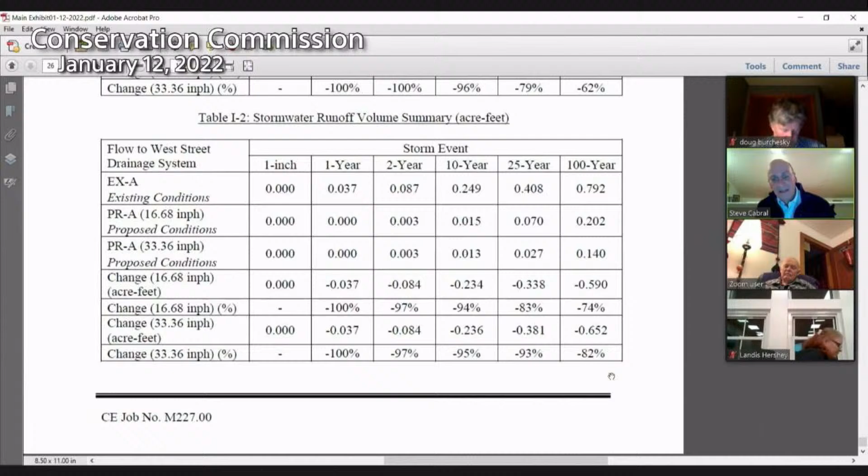So this clearly shows that the design as proposed is going to be a significant benefit to the community because we're significantly reducing the effluent that's going to get to that low point.

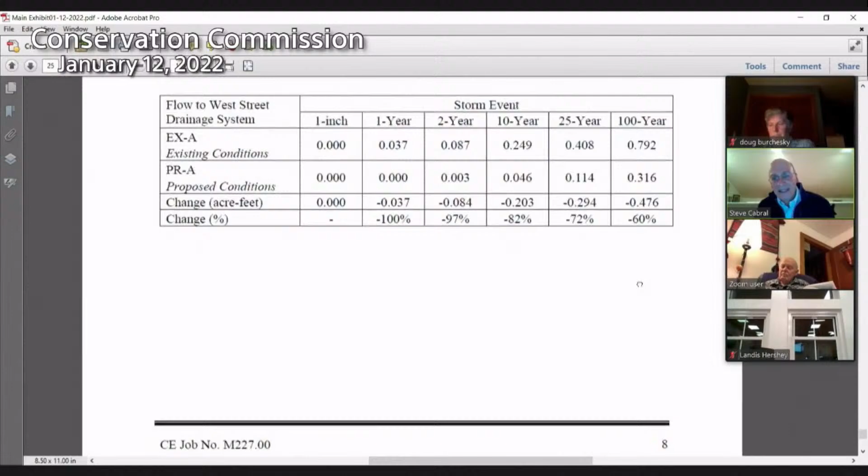And from discussions with Carl, what Carl's comments now are focusing on is fine-tuning it just to see, can it be even better? From discussions, Carl had said he recognizes that this is a significant benefit. He's just asking, are there any minor tweaks that can be done to actually reduce this further? But as we work with Carl over the next couple of weeks, there really will be no substantive change to the site plans themselves. If anything, it would just be a minor change to some of the details.

So that's a very quick overview, and I'll be more than happy to do my best to answer any questions that you may have. Okay, thank you.

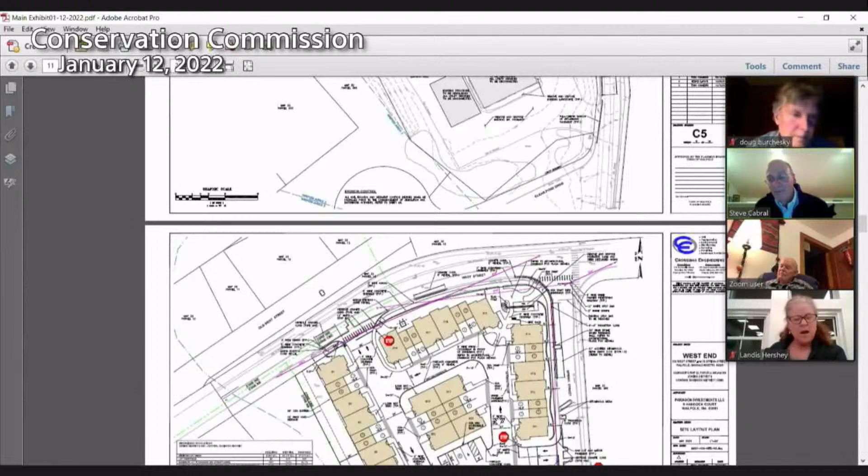Landis? Yeah, I just have two comments. One, so the buildings that exist on the site are going to be demoed and the material stockpiled and removed from the site, I assume. And then yes.

The site will be left for some period of time. So my question is, one, how will the site be left, and for how long before construction begins?

The intent of the owners would be to begin construction as soon as possible, well, there's sort of a domino effect. DryX has offices on this site. So the goal would first be to actually build a facility potentially on Route 1 and move there prior to demoing, or they'd have to move to a temporary facility, which they may do. But it's my understanding that as soon as the buildings are demoed, construction of the new project is going to be continuous.

So there is no intent to have a dormant period at this time. So as soon as the buildings are demoed, the contractor would be required to follow our soil erosion control plan that's in the plan set, as well as the SWPPP.

Okay. And then my other comment was just from my conversation with Carl today, and that was before he sent out that letter, but he was looking to have another infiltration unit put in the parking area.

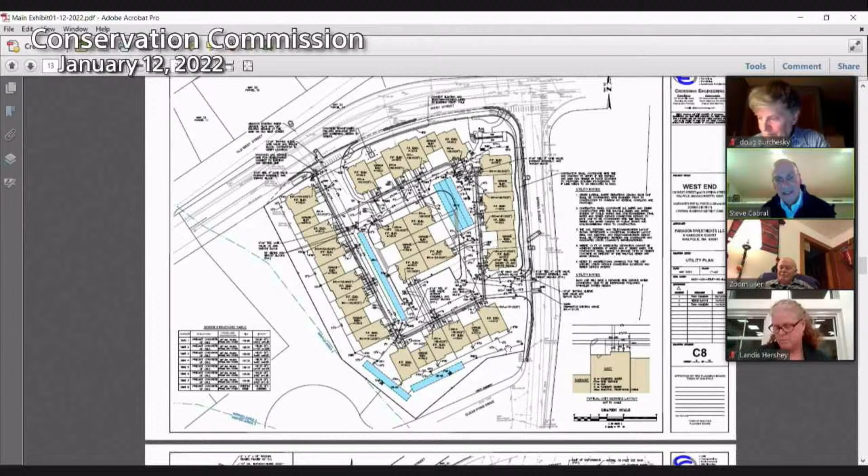We did look at reducing the amount of impervious surface as much as possible. There was a time where we had narrower aisles, down to 20 feet. But one concern of the fire department was that they wanted to make sure that when their fire trucks drive through the property, the turn and swing of the truck cannot extend into an opposing lane, per a state code requirement. In order to satisfy that code, we actually had to increase the width of the lanes again, and we also minimized the amount of visitor parking as much as possible.

And any of the landscape areas on the perimeter of the property, they can't be used for infiltration?

Well, at the perimeter of the property, it's going to be natural, so there will be some natural infiltration. But what we found is you really need to have certain clearance from an infiltration system to a building so that you don't impact the basements. You also don't want an infiltration system too close to a public street, so you don't want a situation where the base of the roadway becomes saturated and causes issues.

Landis, if I may, as I mentioned, we're reducing the stormwater runoff volume significantly above and beyond any town or state standard. We did that because we agree there's a problem and we wanted to do everything we possibly could. But if you glance at this utility plan, you'll see that the footprint of the water, sewer, gas, underground electric and cable, and the infiltration systems doesn't leave a substantive amount of space. The only area would be to put a very small infiltration system here. We could certainly look at that with Carl, but is there going to be a significant benefit to make spending the thousands worth it? It's certainly questionable, but we will look at that.

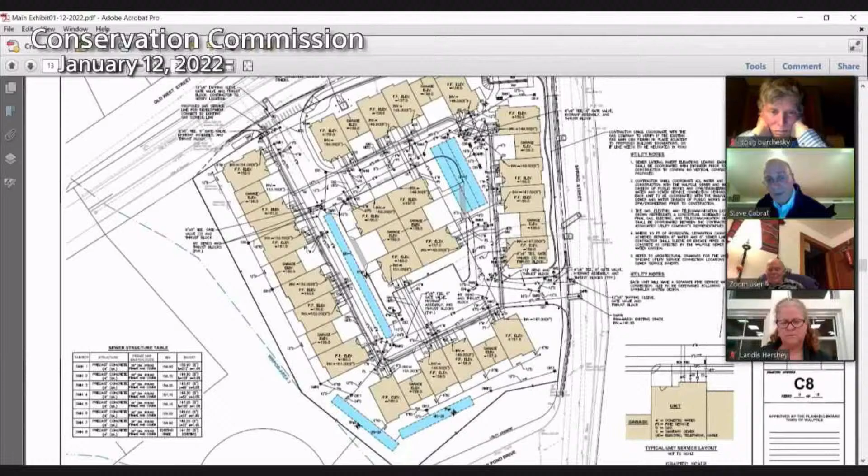So none of Carl's comments are going to result in a substantive change? That was my intent. Okay, yeah, fair enough.

I always want to push developers and designers to look at green spaces, even in urban areas. So that's why I always ask these questions: is there anywhere else you can create pervious surface, landscape areas, or trees on site? I understand this is a very densely developed site, you've got a lot jammed into it. So I always like to challenge, is there any green space or shading we can provide in the design which would benefit the urban area?

Yes, I agree. One edit made over the past couple of months is that the architect, after hearing similar feedback, reduced the size of some of the units as much as possible. The owner and architect did their best to squeeze the size of the buildings to the smallest extent possible, and even the location of the garages, they're as close to the road as possible to fit one more car in front. So I can honestly say that working with the owner and architect for the past 6 months, we did our best to maximize green space.

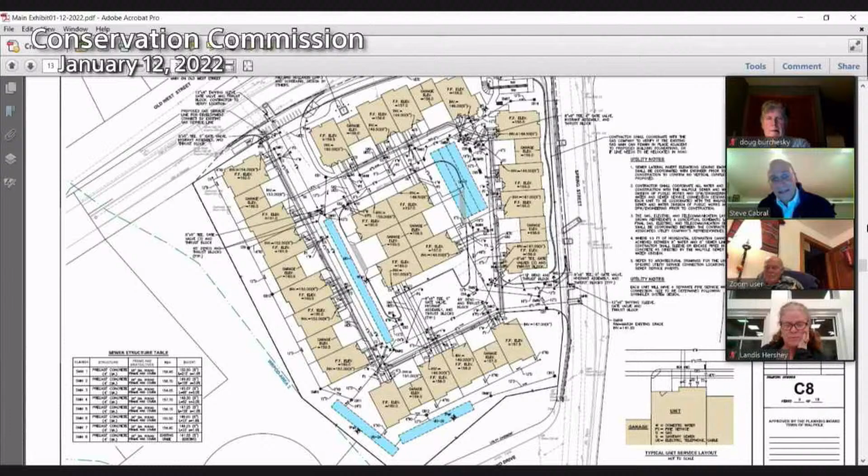And I do agree, looking at the plan, there seems to be a lot of impervious surface, but there's certainly a significant amount of underground infiltration system. So the net gain is significant when it comes to groundwater recharge as well as water quality. Currently, under existing conditions, you have a significant paved area where there are no water quality controls whatsoever. There's not even a catch basin on site. All of the runoff and pollutants on the parking lots just drain directly into Spring and West Street.

That will not happen with the proposal. All of the runoff will be collected, treated, and infiltrated. The planning board and Carl have done their best to squeeze and push, and they're certainly looking out for the town, just like you.

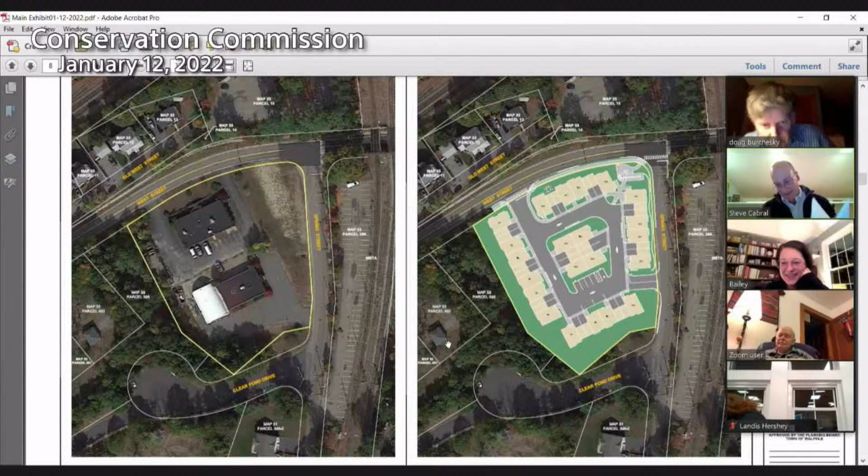Okay, Bailey, any questions? Yeah, two, sorry, I might have misheard. Is it 22 or 24 units? 22. There was a time it was 24, part of the downsizing when the units were a little bit larger. I'm just going to triple check, but I'm sure it's 22. No, 6 months ago it was 24. Oh, you know what, I'm sorry, we can all look together. So 2 parking spaces per unit, so 22 units. Excellent, okay, thank you for clarifying that.

And my second question regarding unit setup, you said the first floor could be used as office space. Is that something the owners could also lease out? No, based upon the zoning ordinance, this is a unique building, so if you owned unit 1, you would be required to have your office on the first floor, and the living space would be on the upper 2 floors. So the first floor cannot be used as living space, and it is used by the owner of the property. It's not leasable space.

And Steve, can I jump in for a quick second here? I was hoping you would. Yes, absolutely. Good evening, I'm Michel Wigney of Mackey and Mackey, one of the associate attorneys on the project. So the concept is really to have, because it's in the central business district, a combination living and workspace that is owned by a single person.

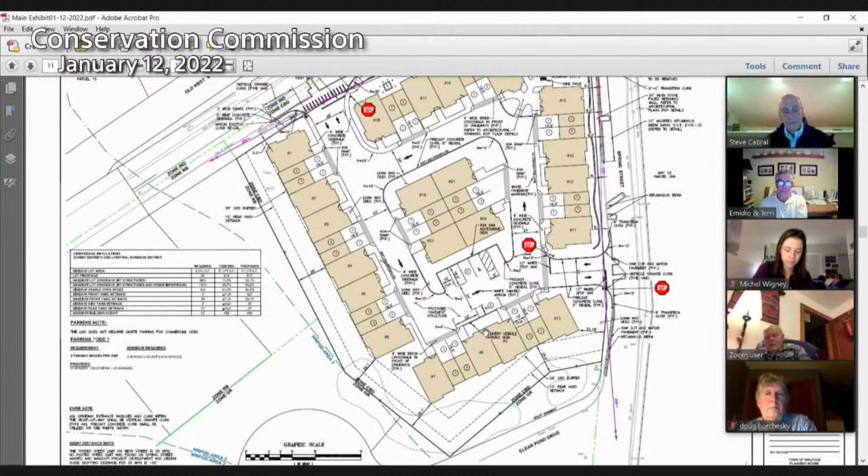Anything else, Emidio? No. Okay, Betsy? No comments. Al? No comments. Okay, anyone in the audience have any questions or comments? Please identify yourself for the record. You can just unmute yourself if you have a comment and you are in the audience, or say something in chat. Okay, hearing none. Do we need the revisions here?

If the applicant wants to close tonight and they're pretty confident that there's going to be no major revisions, then they can request to close.

I think the only thing that was recommended was an additional infiltration unit, was that it? Yeah, Carl had mentioned that, but I don't know if further along in the afternoon he changed his mind. It would be because of the overflow, during the 100-year storm, which would bubble out through the catch basin near Spring Street.

Yeah, that was one of the situations that could occur. Just to clarify, that bubbling overflow is, say, 90% less than the overflow that goes there today.

Okay, Landis? Yeah, the plan is not really up, but so the last time we met, we looked at a plan with the patio and the pool and the wall, and I know there were some questions about the wall. We did not have a DEP number or DEP comments yet. The original house was permitted by the Conservation Commission for a house and a rear grassed yard.

It was 4,300 plus square feet of riverfront area alteration for the backyard. So I had some discussions with DEP about the difference between the alteration for the backyard versus alteration for an impervious pool, patio, and wall, and how that is different. Originally I was thinking once you alter the riverfront area, you alter the riverfront area, but it doesn't work that way - it's the interest of the river as well, for stormwater and flood control and other things. So I think DEP originally was asking for

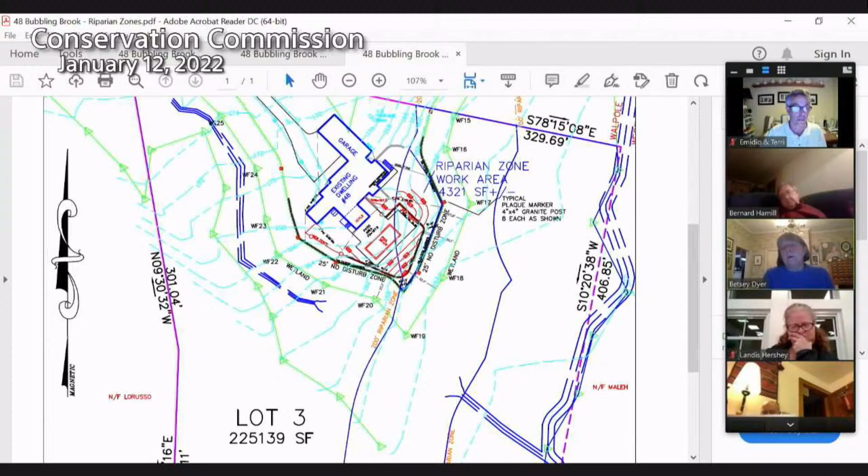It's not what we usually ask for work in a riparian zone. So that's all I'll say on it. I actually don't feel comfortable letting this happen without seeing alternatives.

I can certainly submit those for your next meeting, but I think this is the project we would really like to build. I think we've addressed the issues you had, and I believe we addressed what you needed. If we had this stuff earlier, we would have addressed it earlier.

No, that's not fair. We did not receive the DEP number. We did not receive the DEP comments. That was part of the whole DEP comments.

But you have the retaining wall. Is it possible to bring the retaining wall up closer to the patio where the pool is? We can do that, that's physically possible. Again, we were trying to balance the cost of the wall against what we could do grading wise.

Effectively, when this project was originally approved by the commission, the work was right up against the no alteration zone. We've pulled it back significantly in a number of areas. Over here we're 9 feet from the no alter zone, over here 7 feet, here 4 or 5 feet. This is the closest spot, and we tried again to pull that back, but we needed some room to put in our geogrid to hold the wall in place. So it was kind of an engineering balancing act to make this thing actually work.

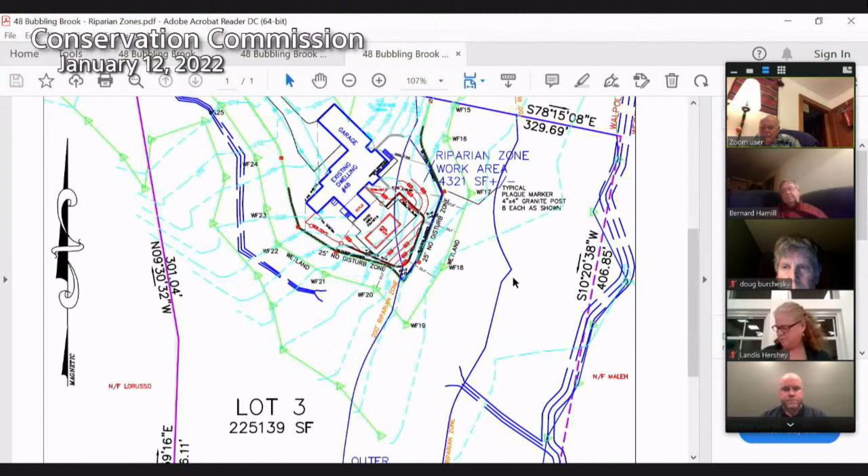Someone make that a motion? So moved. Second? Okay. All in favor? Dean, aye. Bailey, aye. Doug, aye. Emidio, aye. Betsy, aye. Al, aye. Jack, aye. Okay, it'll be continued 8:30 on January 26th.